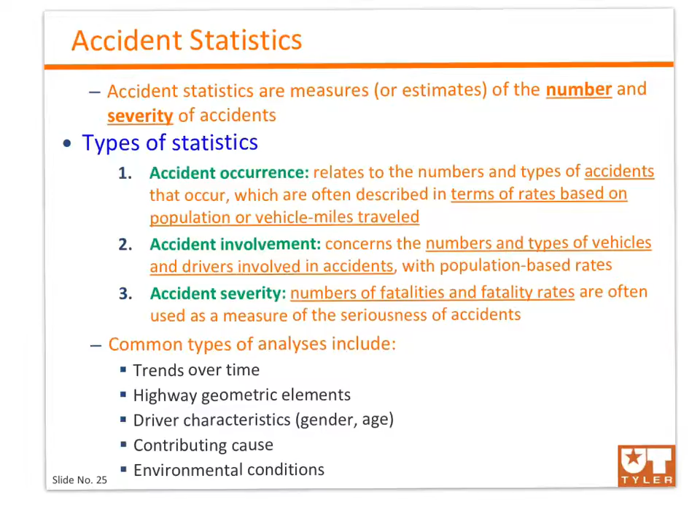So let's start with the assumption that we use just simple statistics. What do I mean by simple statistics? If I were to compare two cities, for example, a big city that has 5 million people and a small city that has 100,000 people. Let's say the big city has 120 people die on their network, while the small city has 100 people die on their network. With simple statistics, you would say the small city had only 100 people die, therefore it is safer to drive on that network.

But in reality, you need to look into the amount of fatalities over the population of that city. If you divide 100 people over 100,000 people, the rate would be way higher than 120 people in the bigger city over 5 million people. So we need to look into those detailed statistics rather than simple ones, because simple statistics cite total numbers of accidents, involvements, and injuries, and they can be quite misleading because they ignore the base from which they arise. An increase in the number of highway fatalities in a specific area from one year to the next has to be matched against population as one of the reference points, or vehicle usage patterns, to make any sense.

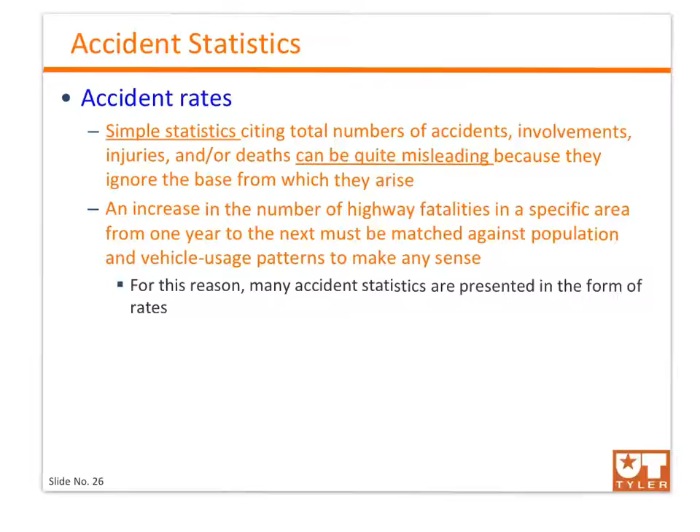For this reason, many accident statistics, as you would see in different textbooks, are presented in the form of rates. So what are those types of rate? The very first type of rate that we use in accident statistics is population-based rates, and those include area population. As I said, if you have a certain amount of fatalities, you divide those by the area population, and that again would tell you how many injuries or how many fatalities we are experiencing per maybe 100,000 people.

The second type of population-based rate is the number of registered vehicles. So again, that would tell us if I have a city that has 1 million registered vehicles versus 50,000 vehicles, this population-based number would tell us quite a bit of significant information by dividing the number of fatalities and injuries over the number of registered vehicles. Same thing for number of licensed drivers, as well as highway mileage. So those are again related to population in one way or another. They are very useful in quantifying the overall risk to individuals on a comparative basis.

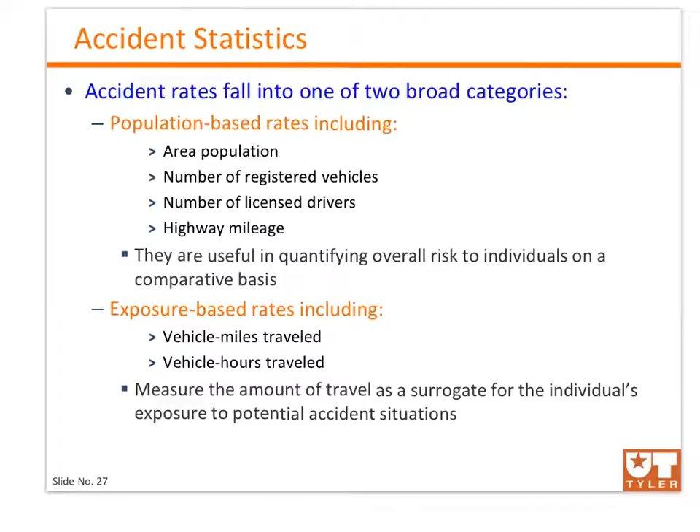There is another type of statistics. In this case, we call it the exposure-based rates, and those include the vehicle miles traveled and the vehicle hours traveled. Those tend to be good measures and statistical numbers that use the amount of travel as a surrogate for the individual's exposure to potential accident situations.

So how do we come up with these numbers? How do we get those rates? There are common bases for accident and fatality rates that are used across the traffic engineering profession. For example, population-based rates are generally stated according to the following. First, if it's done based on the area population, it's going to be fatalities, accidents, or involvements per 100,000 area population.

When it comes to registered vehicles, we typically get the rate based on every 10,000 registered vehicles. When it comes to the licensed drivers, the common base would be per 10,000 licensed drivers. And when it comes to the miles of highway in that city, it's going to be the number of fatalities or accidents or involvements per 1,000 miles of highways.

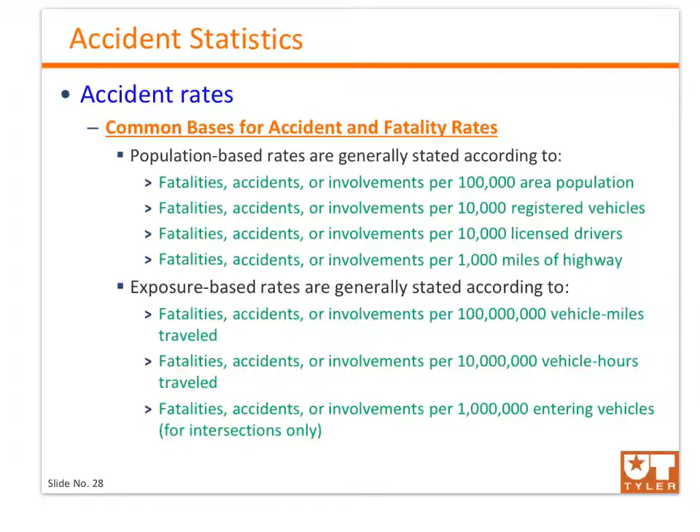When it comes to the exposure-based rates, they are generally stated according to the following numbers. First, I can divide the number of fatalities, accidents, or involvements per 100 million vehicle miles traveled, or it can be per 10 million vehicle hours traveled, or 1 million entering vehicles, and that's mainly used for intersections.

So let's have an example of how we can compute accident and fatality rates. The following are a sample of gross accident statistics for a relatively small urban jurisdiction in 2008. You can see those are the given numbers. We have 75 people died, and the fatal accidents were 60. Injury accidents were 300. The PDO accidents have to do with property damage only. So we had 2,000 of those, and we have a total of 4,100 involvements.

The vehicle miles traveled in this city is about 1.5 billion miles. When it comes to registered vehicles, it's 100,000, and when it comes to licensed drivers, we have 150,000 drivers, and the area population for this city is 300,000 people.

So in general terms, all rates are computed with the following simple equation. The rate, whether it's a population or an exposure rate, is going to be the total number of accidents, involvements, or fatalities, times the scale, over the base. The scale is the scale of the base statistic, such as X vehicle miles traveled, for example, while the base would be the total base statistic for the period of the rate.

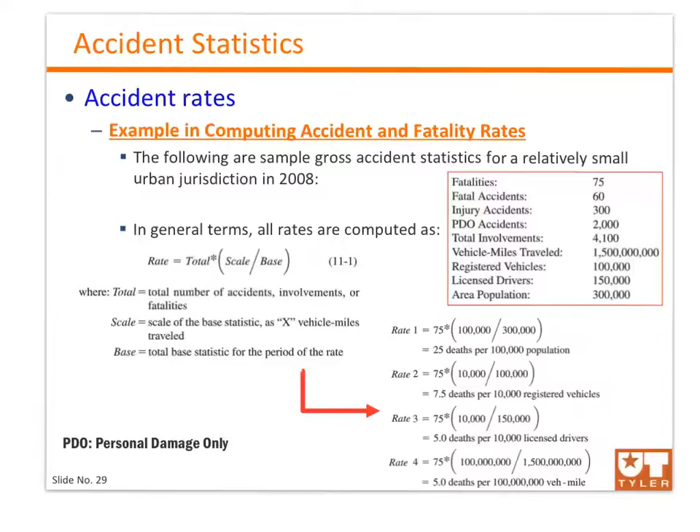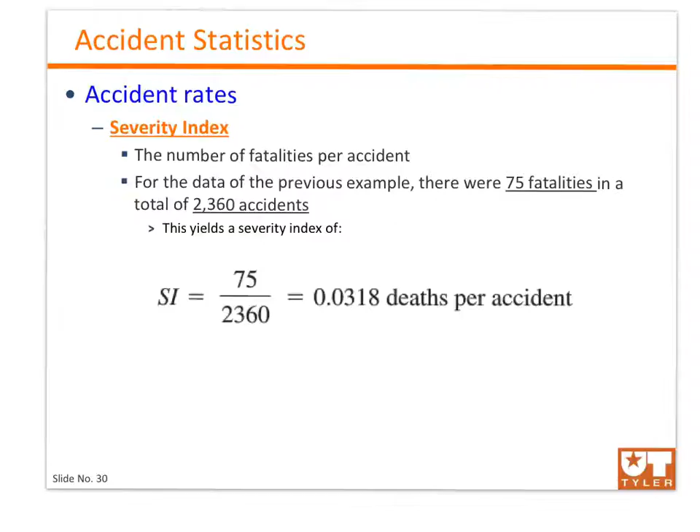Now I can move to another type of accident rate, which is the severity index. Severity index is the number of fatalities per accident, as simple as this. So it's a simple rate that relates the number of fatalities over the number of accidents. So for the data that was shown in the previous slide, there were 75 fatalities in a total of 2360 accidents, and that's going to lead us to the SI, the severity index, which is equal to 75 fatalities over the number of accidents, and that shows us that we have 0.0318 deaths per accident. So that's the third type of index that we use in terms of accident rates and accident studies.

Now, after we do the rates, we can also talk about how we can display these accident rates. So as you could tell here, we have in this graph the number of years from 1915 all the way to 2005, and the y-axis would show you the statistic, which can be the number of accidents, for example. As we discussed last time, there's a declining death rate since the 1970s. One of the reasons was the imposition of the national 55 miles per hour speed limit. But the more practical reason that kept us going until now is really the improved highway and roadside design, as well as the improved vehicle design.

But the problem that we're still seeing in this graph is that there's still a continuous increase in vehicle miles traveled. So you could see that the deaths would go up and down, and now it's pretty much fixed since the 70s. The 70s and 60s were high. This is the high number versus what we're experiencing here, and I think this is the number of deaths on the y-axis. We used to experience about 50,000 people dying, and now it's around 40 or 41,000, and this number has been stable in the last decade or so.

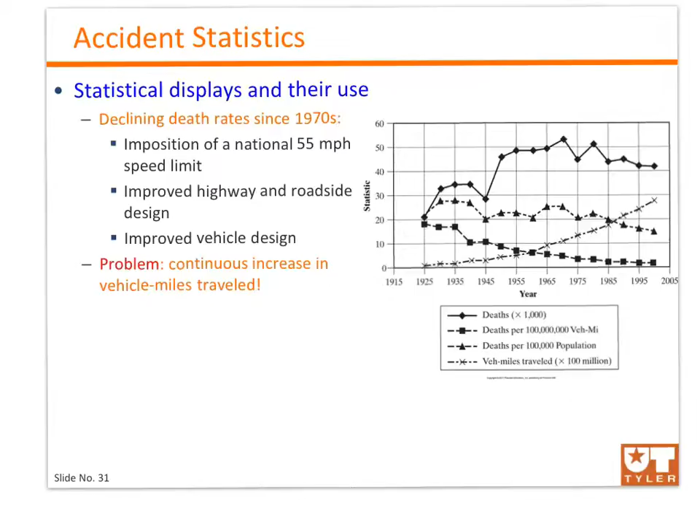Another type of statistics that we like to do in certain locations is to identify high accident locations. We can do all the rates that I talked about in the last couple slides from the city perspective or from a state perspective, but sometimes you have one or two headache locations, intersections in your city that have high accident rates, and you want to make a distinct conclusion that this location really has a significantly high accident rate from a statistical point of view. So how can we do this on certain locations? Those locations with accident rates in the highest 5% of the normal distribution would need to be distinguished. So how can we do this from a statistical point of view?

Now we're going to probability and statistics. In a one-tailed test, the value of z for the probability of z less than 0.95 is equal to this number. If you go to the bell-shaped curve that we typically see in a one-tailed test, we would need to look into that highest 5%. So that's why we say the value of z for the probability of z less than 0.95 is 1.645. The actual value of z for a given accident location can be computed as follows. Z is equal to x1, which is the accident rate at that location, minus the average accident rate for locations within the jurisdiction under study, over S, and that's the standard deviation of accident rates for locations within that place.

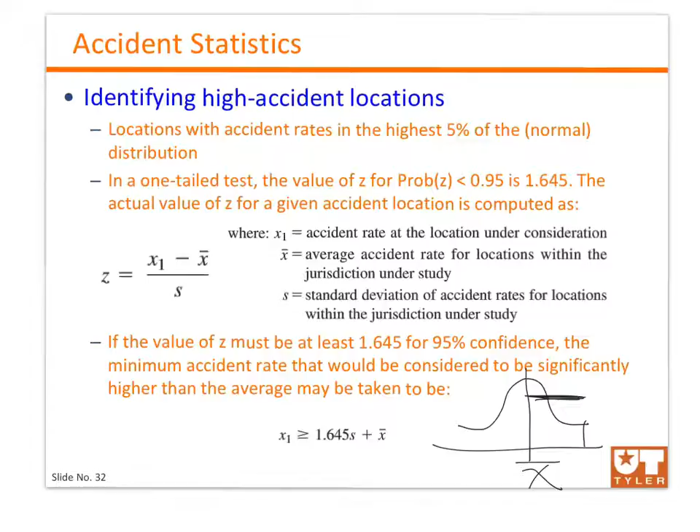So let's have an example. Let's assume that a major signalized intersection in a small city has an accident rate of 15.8 per 1 million entering vehicles. So this is the location. It has 15.8 per 1 million entering vehicles. The database for all signalized intersections in the area indicates that the average accident rate is 12.1 per 1 million entering vehicles, with a standard deviation of 2.5 per 1 million entering vehicles. And the question here is, should this intersection be singled out for a study and redesign?

So we need to look into it and see if this location is having a highly significant amount of accidents compared to the average of the city. So what do we have? The number for the certain location is 15.8, and we need to see if it is far away from 12.1, which is the city average. How can we do this? We need to test if 15.8 is higher than or equal to 1.645 times the standard deviation, which is 2.5, plus 12.1, and the number is 16.2. In order to qualify that this location has a significantly higher amount of accidents, the rate for that location has to be 16.2 or higher, while what we see in our location is only 15.8.

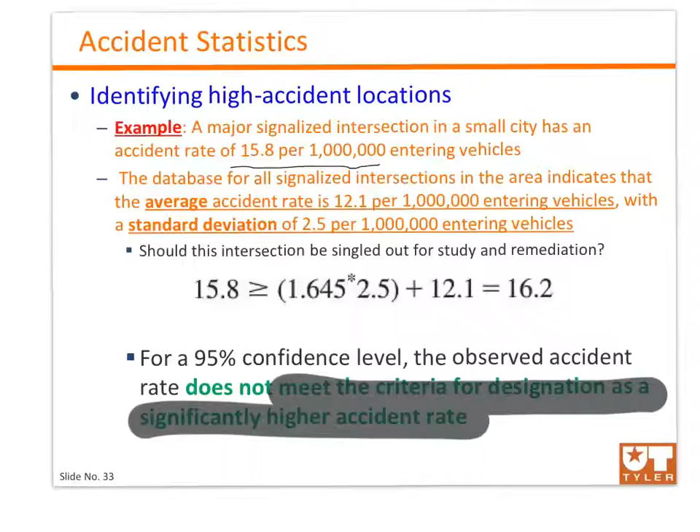So based on this, and using the 95% confidence level, the observed accident rate does not meet the criteria for the conclusion that this location has a highly significant amount of accidents compared to the city. So how about if the standard deviation is low? If we have a low standard deviation, maybe it's going to be a different story, but for now we have to have at least 16.2 per 1 million entering vehicles in order to say this location needs to be looked at and further improved for future design.

Another way of identifying high accident locations is by plotting the entire location. This is an example that shows lots of streets and lots of intersections, and all you can do is plot the fatal accidents and other accidents, and whether they are motor vehicle versus pedestrian or other motor vehicles or other traffic. As you can see, this is what we use to identify what type of accidents these are, and by plotting all these types of accidents at the city level, you could easily look at this intersection, for example, and tell that a lot of accidents happen at this location. And you could tell what type of accidents.

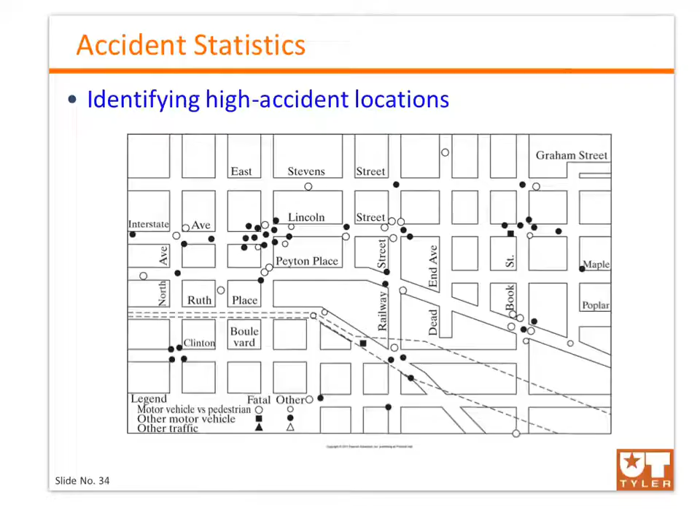You can see here they are not fatal, but they have injuries, they can have vehicle loss, and the type of the accident is other motor vehicles. It's not motor vehicles versus pedestrian. Same thing again with this location. You could tell very easily by looking at the picture what type of accidents are there and the frequency of the accidents.

Now let's talk about the site analysis. Assume that you find a location that has been statistically identified as a high accident location. The next step is to come up with detailed information that is required in two principal areas. First, we need to know the occurrence of the accidents at the location in question. Second, we need to know the environmental as well as the physical conditions existing at that location and make a conclusion whether those conditions are related to the accidents or not. In order to do so, we typically need two primary graphical outputs to be prepared. The very first one is the collision diagram.

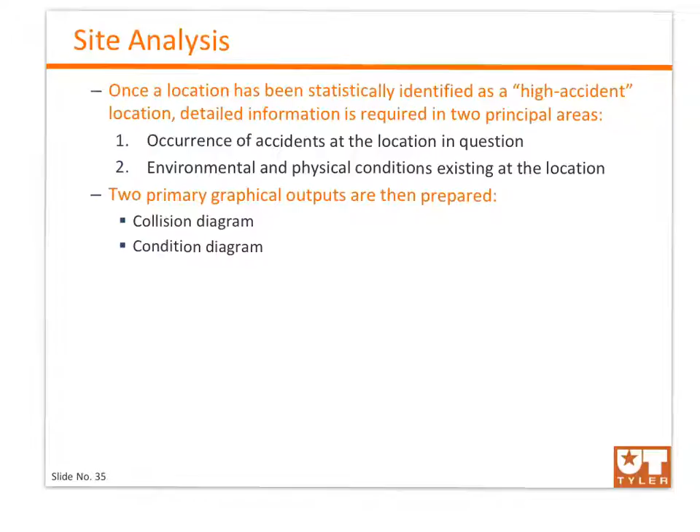Second is the condition diagram. And as you could tell, these two types of diagrams are answering the 2 points above here. The occurrence of the accidents is going to be related to the collision diagram, while the environmental and physical conditions are going to be answered by knowing and seeing the condition diagram. So let's take a look at these two diagrams and how we can make conclusions at that location.

First of all, collision diagrams. As you could see here, I'm showing a schematic representation for all types of accidents occurring at a given location over a specified period. And when I say specified period, this usually ranges from 1 to 3 years. That's what you need to show for a certain site analysis. And typically this is what's used in the traffic engineering profession. Those are the symbols. And what do they mean?

For example, a single arrow means this vehicle type is a passenger car. If I have the same arrow but there is a T on top of it, that means the involved vehicle was a truck. If there's a B, that means it was a bus. If there's a C, that means it was a bicycle or a motorcycle. O means it's an other. If I have a dotted arrow, that means this accident involved a pedestrian. So again, the first portion of this table shows the vehicle type that was involved in the accident.

The second portion here talks about the movement symbols. What happened at that accident? Was there a left turn? Was there a right turn? Was there a straight movement? Then we also need to show in this collision diagram the severity. Did I see a property damage only type of severity? Did I see an injury severity? Did I see a fatal incident?

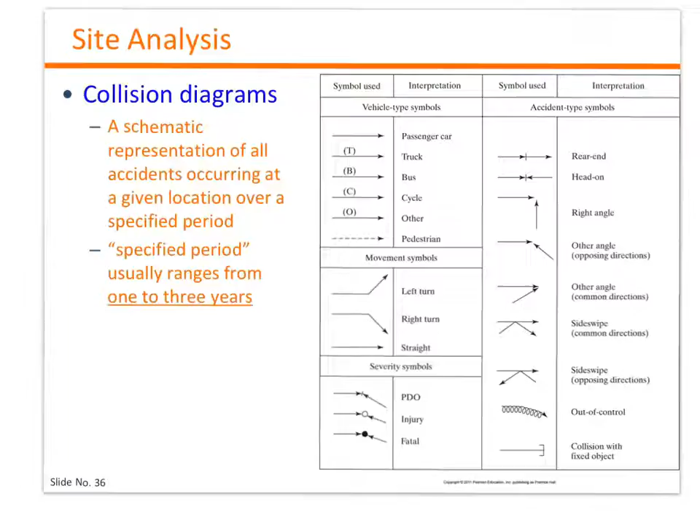So by looking into the vehicle type, the movement symbol, the severity of the accident, and the type of accident that happens, if we make use of all these symbols and put them in one diagram on that intersection, we could see lots of information by looking at one single picture. This here is an example of a collision diagram.

So this intersection has experienced, based on what you could see, primarily rear-end and right angle collisions. Right angle collisions, as you could see, are making the 90 degrees, and lots of rear-end, as you could see here. Pretty much in all the locations you have rear-end collisions.

How about injuries or fatalities? We could see that the majority are several injuries but no fatalities during the study period. How can you tell? From just looking at the diagram, you could see those circles are empty circles. If they are full circles, that means it's a fatality, based on what we saw in the previous slide.

And sometimes this type of diagram can come with a small table beside it to show the accident summary. As you could tell, there are no fatal incidents, but we have 5 injuries, and we have much more than this, about 3 property damage only during the day, 10 during the night, and that's going to give us a total of 13 PDO, 0 fatalities and 5 injuries, so a total of 18 incidents.

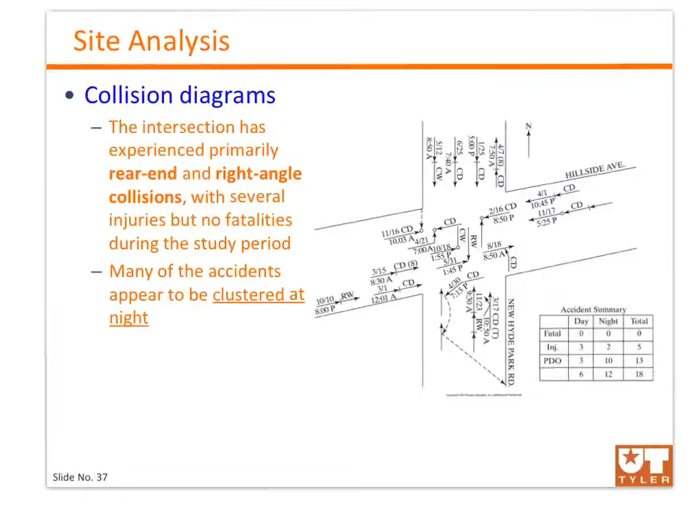Another thing that we can show from this little table beside the collision diagram is that many of the accidents appear to be clustered during nighttime. You could see 6 at daytime and 12 during nighttime, so the number of accidents doubles at nighttime. And that also might tell you some of the reasons. Maybe the lighting conditions at that location are poor, and we need to work on it to improve the sight distance during nighttime.

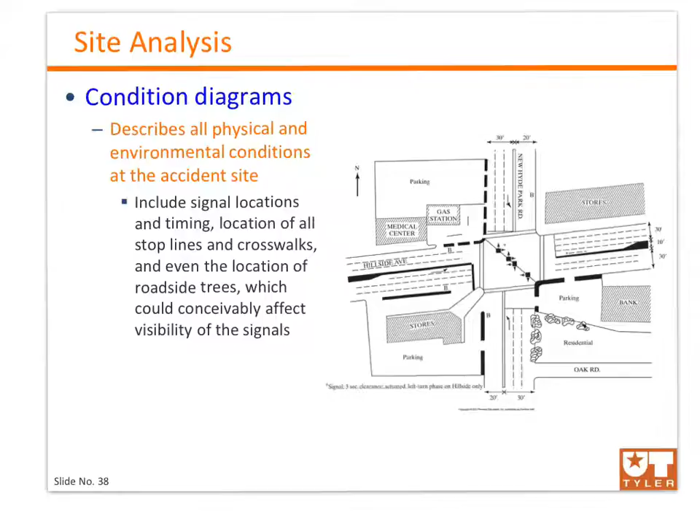That also can have a big effect on having rear end accidents. So based on taking a deep look into these two diagrams, I was able to sum up some of the conclusions if you take a deeper look into these two pictures, and I put them here.

So how can you now interpret the condition and the collision diagrams? For each type of accident, there are 3 questions you should ask yourself, and you should come up with answers as well. First, what driver actions led to the occurrence of such accidents? Second question is, what existing conditions at the site could contribute to the driver taking such actions? And the third question would be, what changes can be made to reduce the chances of such actions taking place?

So as we saw from the two diagrams, especially the condition and the collision diagrams, rear end accidents occur when the lead vehicle stops suddenly or unexpectedly, and/or when the trailing driver follows too closely for the prevailing speeds and environmental conditions. The condition diagram also shows a number of driveways allowing access to and egress from the street at or near the intersection itself.

As I told you, beside the bank there was a parking lot, and that parking lot would lead out very closely. Once you leave the parking spot, you would be super close to the intersection. Maybe we need to change that entrance of the parking lot to be a little bit away from the intersection location.

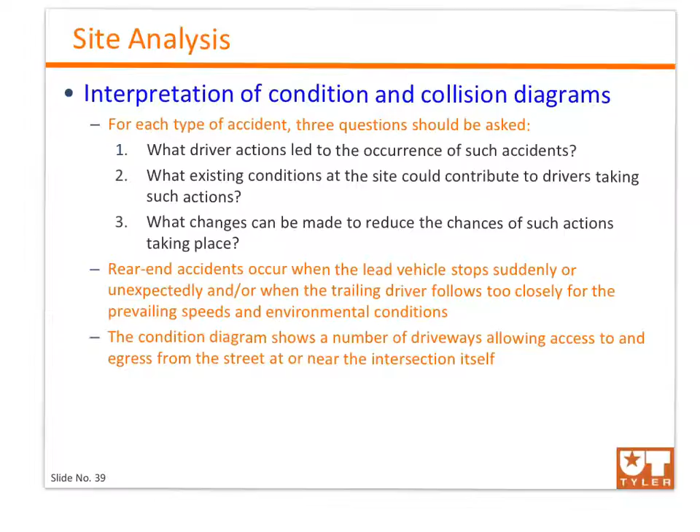Another thing that we could see from these two diagrams is that unexpected movement into or out of these driveways could cause mainline vehicles to stop suddenly, because of these driveways, and stop lines are located well back from the sidewalk line, particularly in the northbound direction. Also, vehicles as a result end up stopping at positions not normally expected, and following drivers may be surprised and unable to respond in time to avoid the collision. And that's why we have those.

There's a great amount of work that can be done here. Potential corrective actions include closing some or all of these driveways and moving the stop lines closer to their normal positions. That could help improve the situation. Another potential cause of rear end accidents would also be the signal timing. Do we have a sufficient yellow or all red interval? Sometimes if we do not have enough all red or yellow time, we're going to have issues, and we're going to have those rear end accidents.

Signal visibility. If we have lots of trees or something blocking the driver's view, that's going to be an issue too. We need to clear the intersection. Roadway lighting, is it adequate or not? Apparently in this location it's not. We have double the amount of accidents during nighttime compared to daytime, and that again shows you that there's something that needs to be fixed at night, and that's mainly the road condition represented by the amount of lighting.

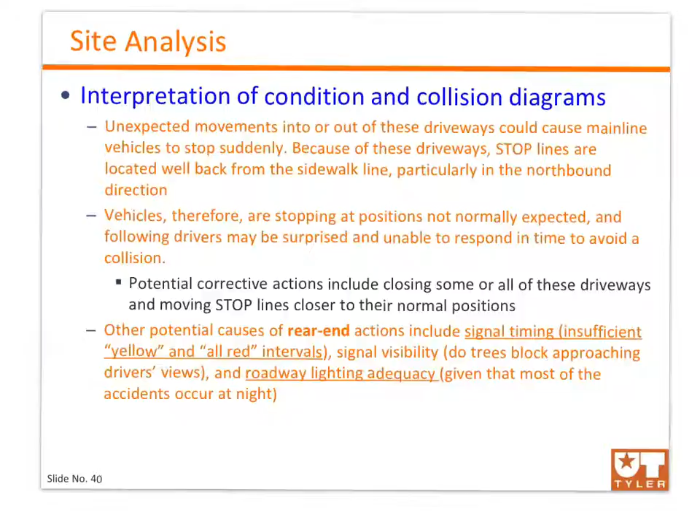Finally, we could also see a few right angle collisions that indicate a breakdown in the right-of-way assignment by the signal. Signal visibility must be checked at this location. Looks like that's a big issue here, and the signal timing should be examined for whether it is reasonable or not. So we can take a look at the parking openings. Instead of making them too close to the intersection, we can move them away. We can work on the signal visibility, and we need to check that.

We can take a look at the signal timing, and again, insufficient yellow and all red intervals could release vehicles before the competing vehicles have had the time to clear the intersection. So that's also a possibility. In conclusion, if the allocation of green is not reasonable, some drivers would typically jump the green or otherwise disregard it. At this location, some of the causes compound each other. The step back of the stop line to accommodate driveways, for example, lengthens the requirements for all red clearance intervals, and therefore it's going to amplify the effect of a shortfall in this factor.

So as you could tell, based on this chapter, in conclusion, we were able to talk about accidents, how we improved the accident rates, and how we decreased the amount of fatalities in our network from 51,000 in the 60s all the way to 40,000, and how we can come up with certain statistics for the city level or for the state level.